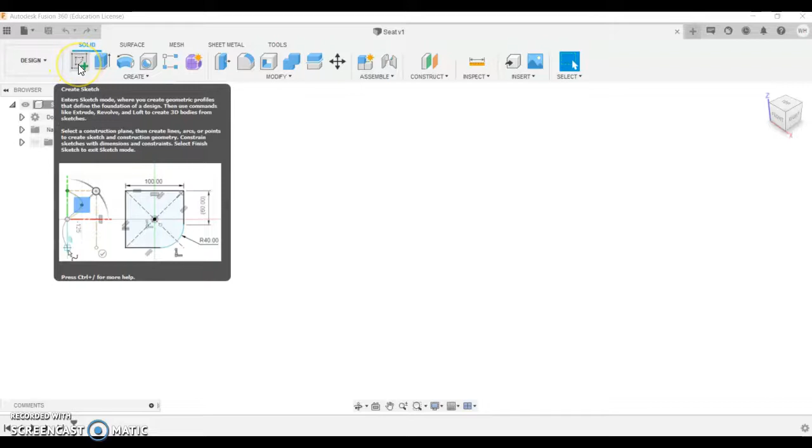Quickly on modeling, so we've got a view cube over here, front, right and top. When I start modeling, I'm going to click the sketch button. We're going to create a new sketch. It gives us the option to select either the bottom plane or one of the side planes to sketch on. It just depends what you're going to sketch.

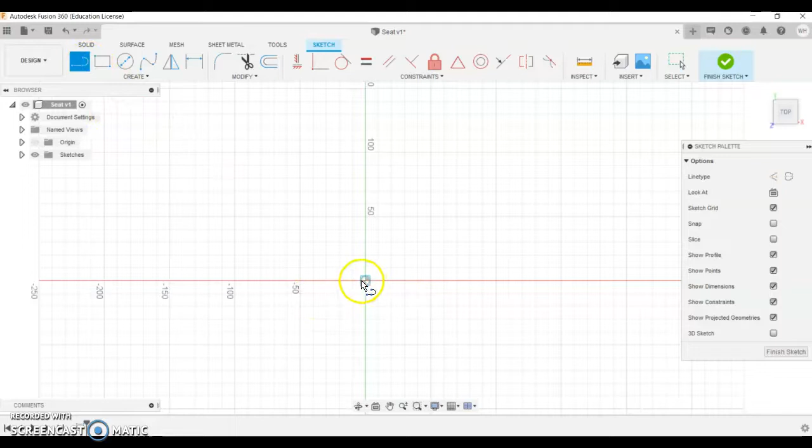But I'll start my sketch on this plane here, which is like the bottom plane, so it flips around and we can see the top view looking down. Whatever I do, I'm going to start on the origin point, because that locks it into position into the kind of space we're modeling in.

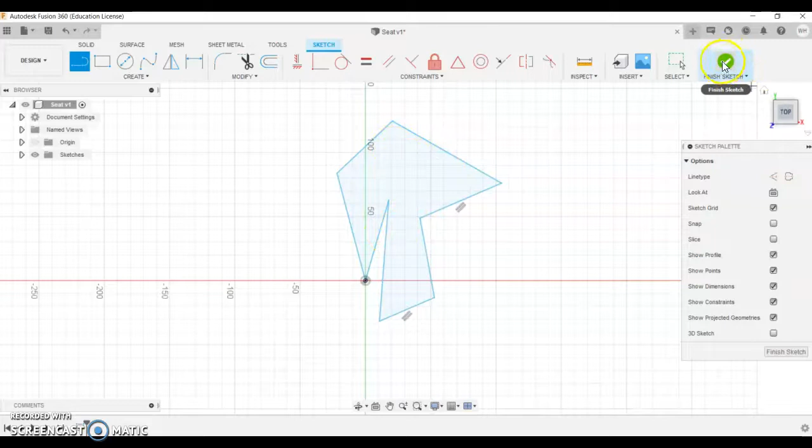If I've got a sketch that's just a series of lines, it's not going to be able to extrude, but as soon as I have a closed profile, think of it as filled with water, it kind of goes blue in the middle. When I finish that sketch of the closed profile, I can pull and push that profile so it's a solid shape.

We're going to create a seat in this one, so I'm going to start with a piece of kind of rectangle. I'm going to add some dimensions on it. So there's a couple of different ways of adding dimensions. You can use the dimension tool up here, it might be nested under the create section if you can't see it on the quick link toolbar.

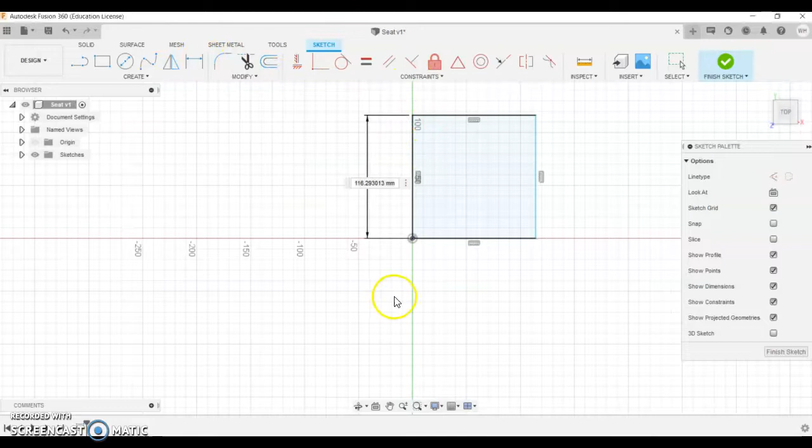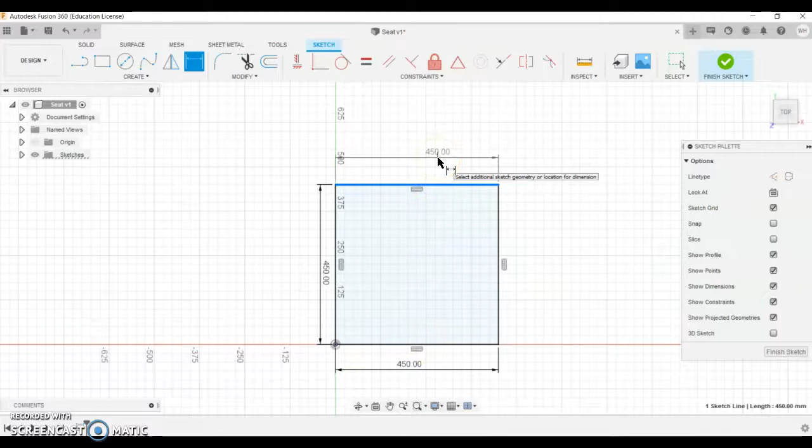Let's just say 450 deep, and we'll go for the width here, 450, make it a square. So I added them manually. D is the other shortcut to dimension, so if you press D, you can get that up. And we're going to have just that square to start with.

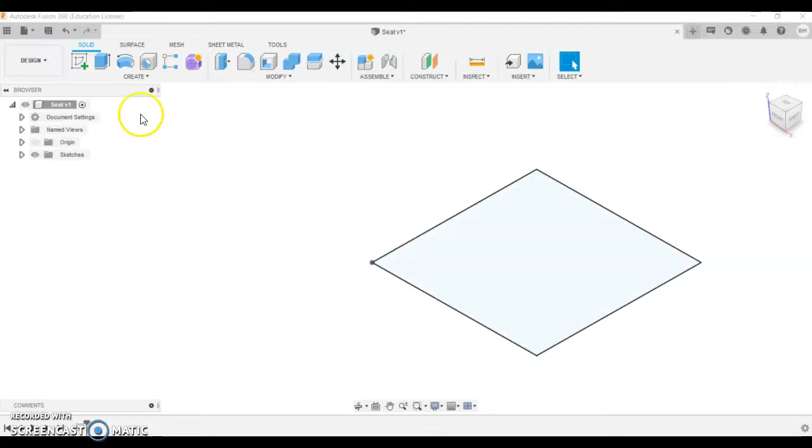Now I'm in the perspective view here, so when I use Fusion, I like to put it into an orthographic view. I'm going to expand that, and one of your options is 12mm plywood, so that's what I'm going to use for this seat project.

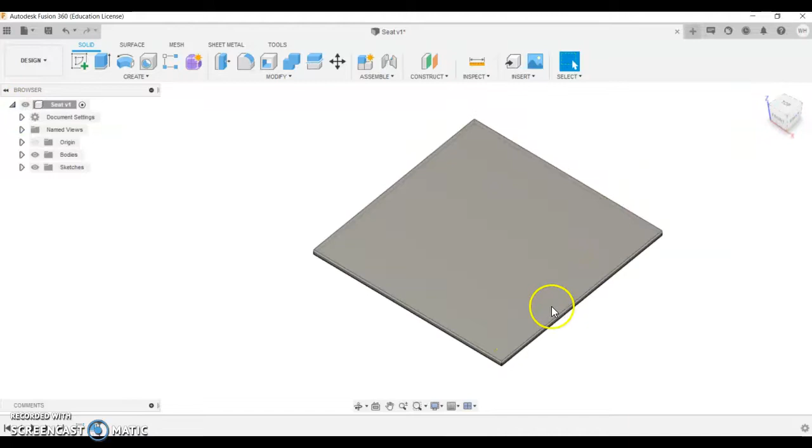So we've got a pretty straight seat there, bottom platform. Now what I would like to do is put some kind of arms on this. So I'm going to go to sketch.

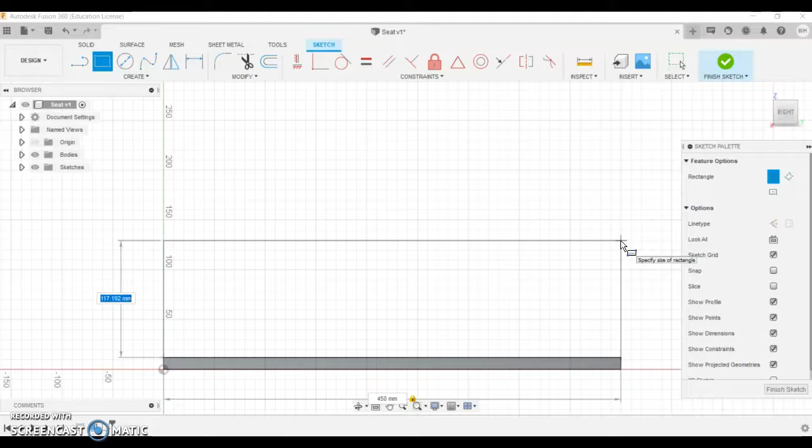I'm going to create a sketch on the side here, and then on the side view I'm going to draw it from this top surface up. I'm going to go the whole distance again, so I'm going to go 450, and I'm going to press tab. Then I'm going to go, let's try 100 mil up. It's a very short armrest, but I'm going to flick the view around.

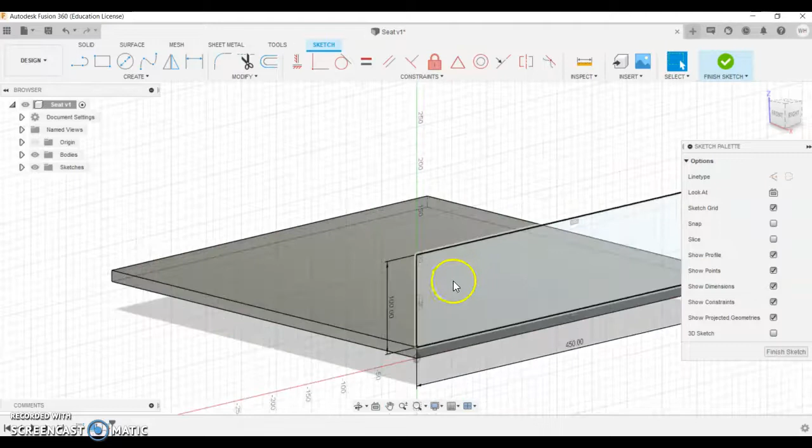So let's just quickly zoom in. You can use your mouse roller up and down. If you double click your mouse roller, the center roller in your mouse, mine's getting a bit tired, I have to click it quite hard. This here will expand or fill the view, the whole screen.

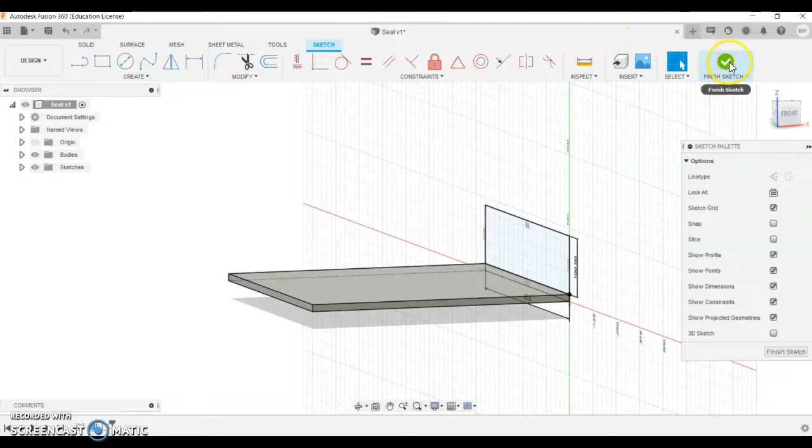Shift and the roller clicker, clicking down, lets you rotate your view, which is a really nice way of quickly moving the view around. If I finish that sketch now, select my profile, and we're going to go 12 mil inwards this time, so -12, and that joins to the other piece.

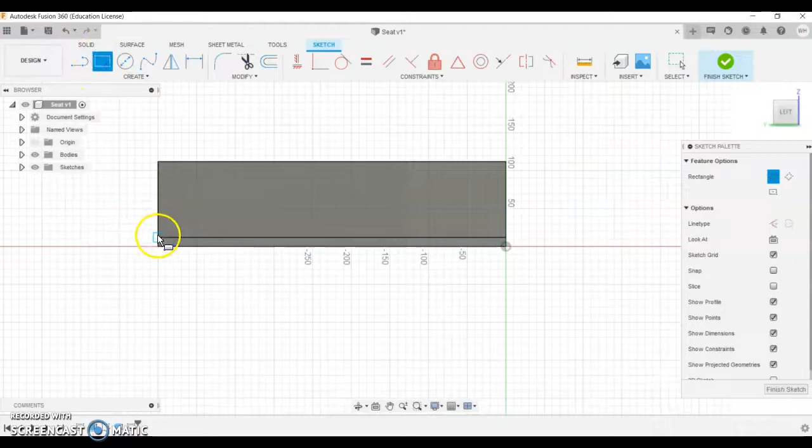So it's really boxy, this. I'm thinking about how I could actually make this in woodwork. I was linking these pieces up, so 450, tab 100, and finish sketch. Rotate my view around and extrude this one out to -12 again. So I've got a couple of little sides on my project.

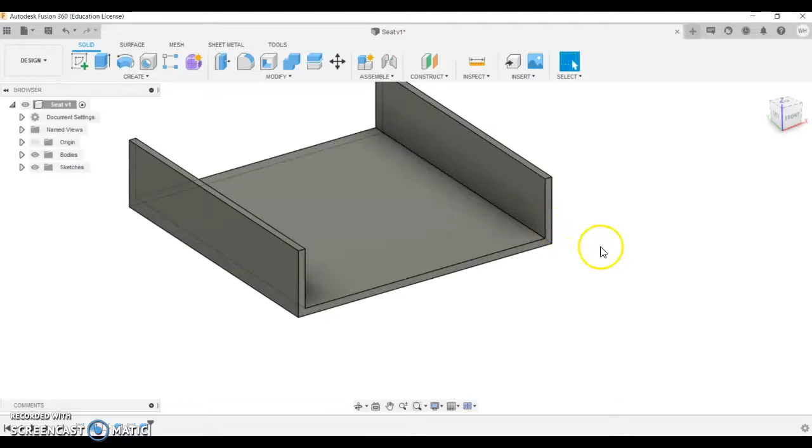Now I'm going to think about the backrest. What I'm going to do is click on this side here, and use sketch again, and draw my side this time at an angle. So at this point I'm just going to cut off this back.

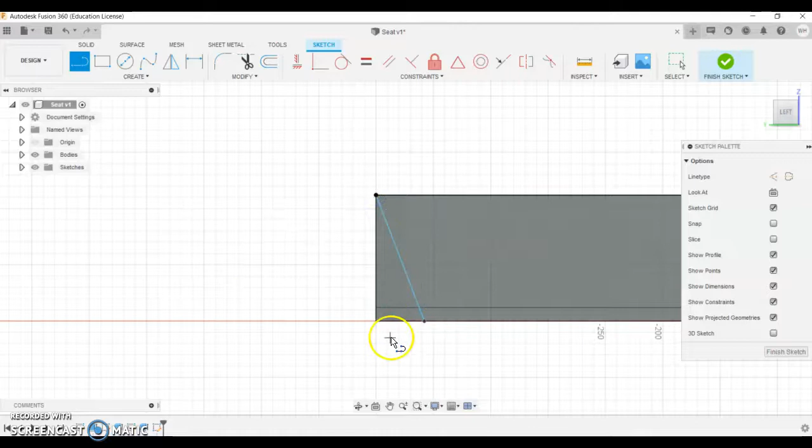Let's think about this, we'll put an angle in. So this is the angle of the seat, and I want it past 90 degrees, since 90 degrees would be upright. So let's just try 105 degrees. That looks pretty good to me. I'm going to finish that sketch.

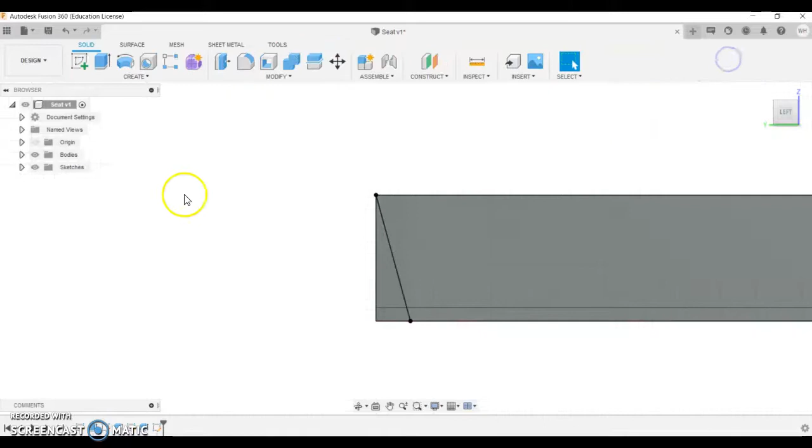I'm going to extrude, and I'm going to click that back triangle, and remove the back of that material.

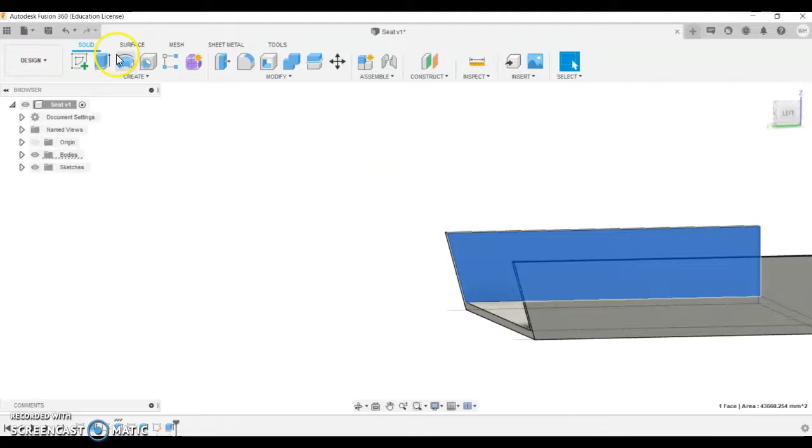Now I want to draw a backrest that sits between these two pieces. So I'm going to choose the inside this time, and click sketch. Now, what's quite interesting with this is if I try to draw through this object, it's not going to let me, because I'm currently drawing on this surface.

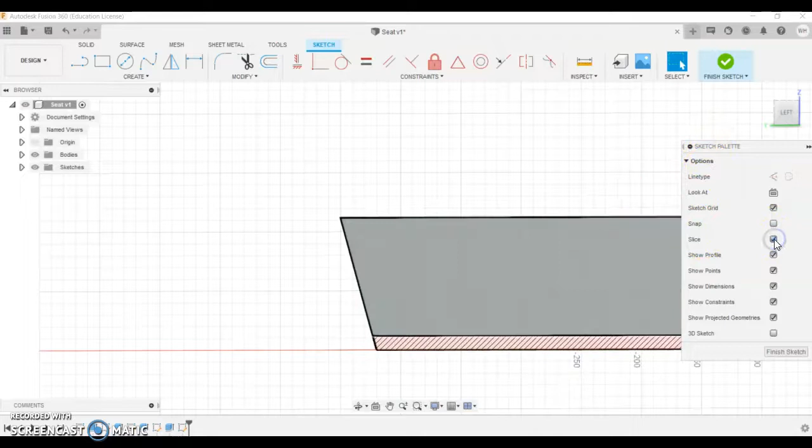If I come down here to slice in my sketch palette, slice, you can see it removes that bottom part of the drawing. So it slices through on the plane that we selected to draw on. That's quite a handy feature.

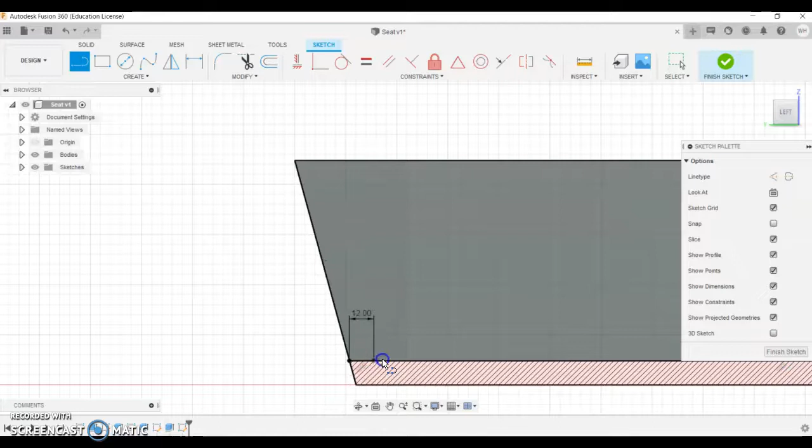I'm going to look directly at the left again by clicking that left view, and zoom in so I can see what I'm doing. I'm going to use the line tool and trace this one, go 12 millimeters across and click, then select that surface and come up, and go 300 mil, let's say 350 up. I'm not going to worry too much about the angle yet.

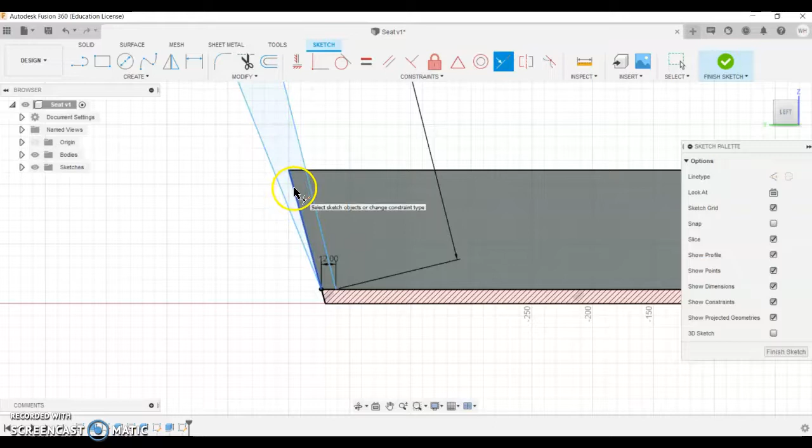So I've got that profile to join. Now what I'm going to do is use some of these constraints. The first one I'm going to use is collinear. I'm going to click on this surface and this one, and collinear will join those two together.

The next one I'm going to do is parallel. I'm going to choose the two lines, and they're going to be parallel to each other. Because I've already set this distance to 12, the distance is 12 here, but you might see there's some kind of foreshortening here, so in hindsight, I'm going to delete that 12 mil.

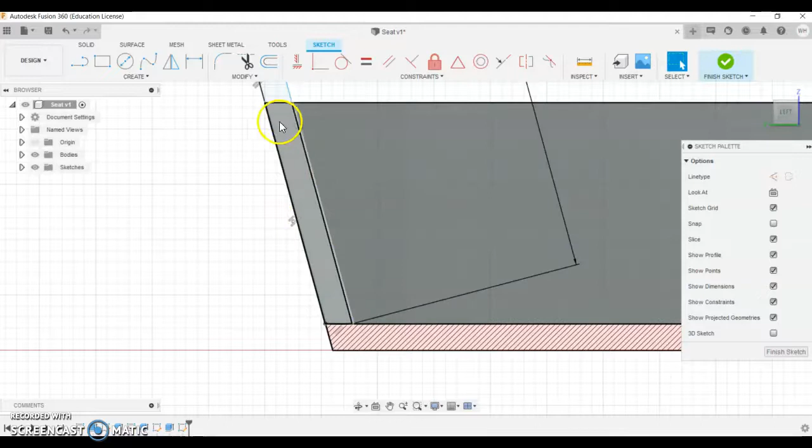I'm going to press D or select dimension, and select between those two there. So you can see that it's only 11.6 millimeters. I'm going to put 12 in there, and that kind of is the discrepancy between the angles, so that it's better sitting there. All the lines are black, which means my project is fully constrained, and I'm going to finish that sketch.

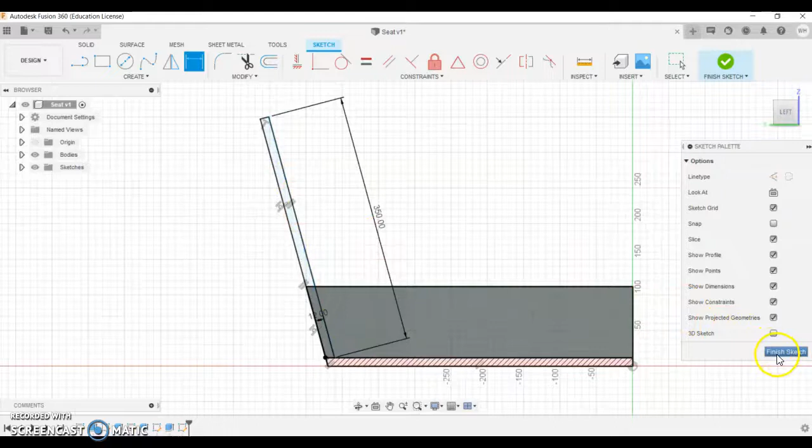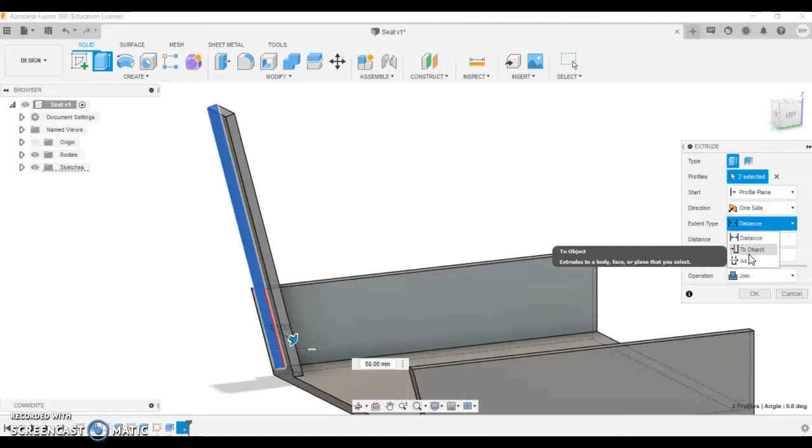I'm going to extrude. You can see my sketch sitting on the inside of this here. When I extrude, I'm going to select both sections, and rather than just pulling that over, I'm going to come over here and go to object in the extent type, and rotate around and click that inside there.

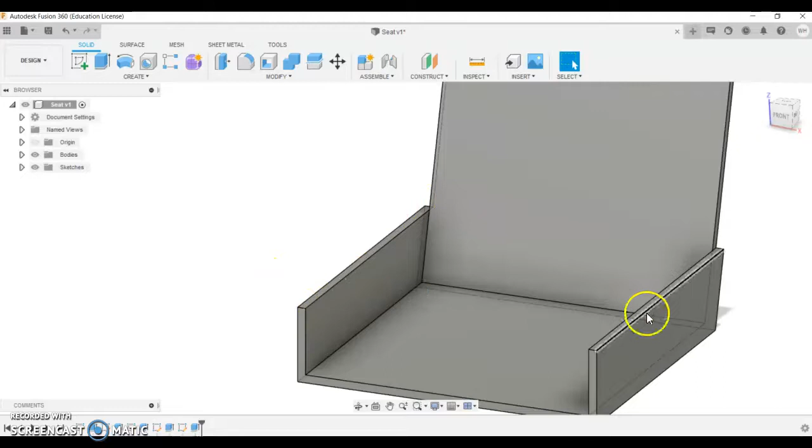So it's a nice, neat way of doing like a pretty basic seat. You can be a bit more creative with the angles that you've used, and you can also put some kind of little overhanging armrests on there for your wheel guards. Put some profiles in this part, but you can see using 12mm plywood, you could reproduce that quite quickly in a woodwork context, if I can speak properly.

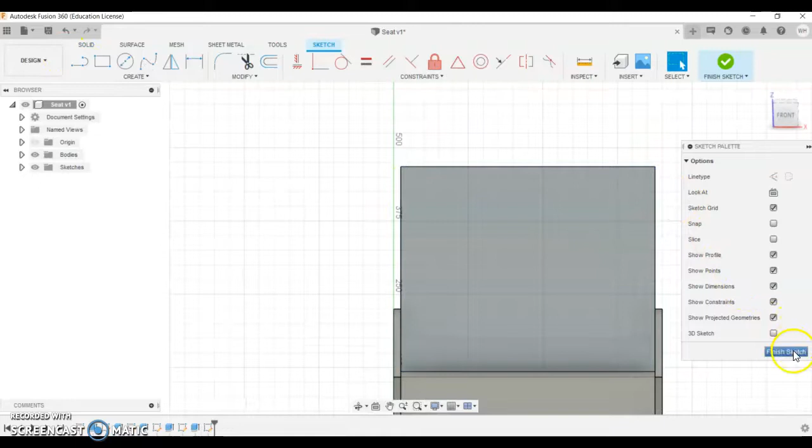So yeah, keep choosing the plane. You might want to round over the seat back, and yeah, be creative with that.